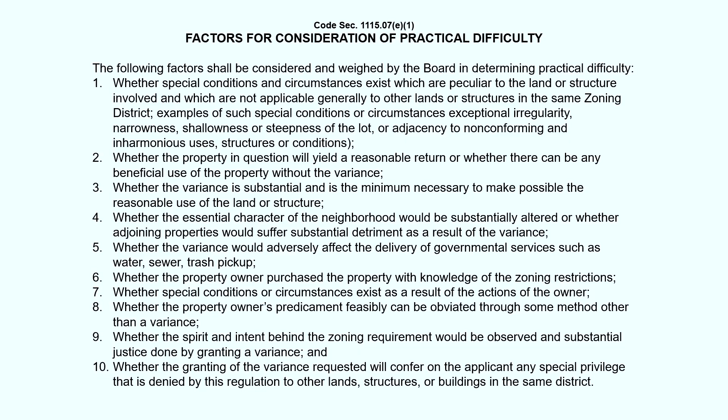This board is the final administrative decision maker for all regular variances. With that, we can proceed to hearing on the matters before us.

The first is calendar number 3622, the application of 2211 Lee Road Owner LLC, located at 2211 Lee Road in a C2X multiple use district, requesting 2 variances. First, to code section 1161.03C1, to permit the loss of 4 parking spaces for a new retail use, and to code section 1161.07A, to permit a drive-through window with less than 10 waiting spaces.

Now, would anyone wishing to testify in this matter please stand if able to be sworn in. Please affirm that you will testify to the truth.

Excellent. Now, there are 2 separate variances being requested. Each one of them is decided on its own merits. As you'll see, the board will have the choice when we get to that part of the proceedings to either proceed with those one at a time or to take the 2 together. That is at the board's discretion.

Now we'll turn to the staff presentation, but before that, can I ask that the staff report dated February 13th, 2026 be entered into the record? Seeing no objections, hearing no objections, the report is so entered. Please proceed with the presentation.

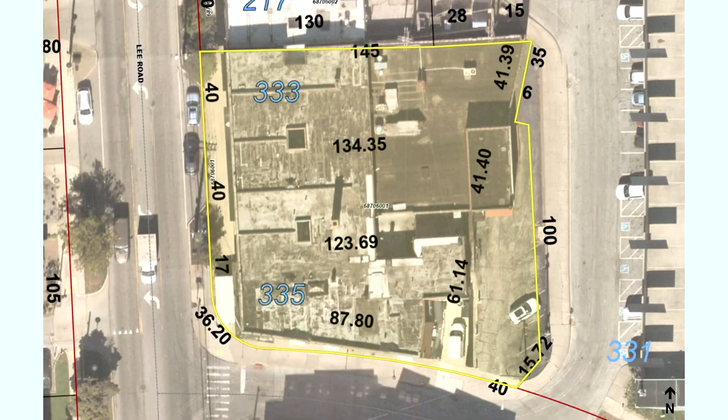From time to time we'll do a brief code background. I wanted to reiterate the purpose of the multiple use district, stated in chapter 1131.01C, which says the C2X multiple use district is established to provide standards for the continued operation of mixed use neighborhoods, to provide for dense mixed uses along main thoroughfares, and to concentrate mixed use buildings to promote and encourage pedestrian activity. Parking and driveways are generally located so as to not disrupt the pedestrian activity.

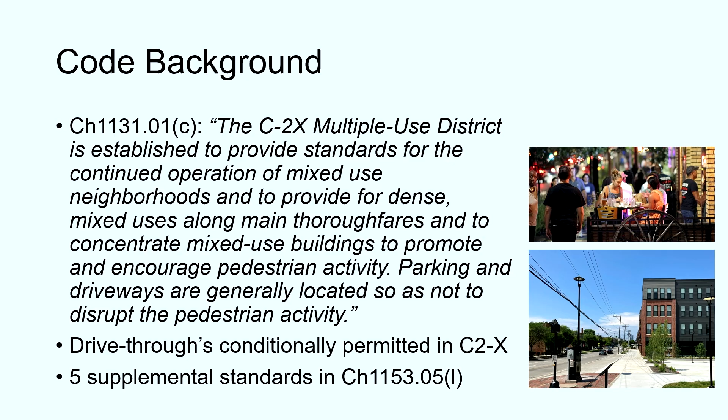Drive-throughs are permitted in the C2X district, and there are 5 supplemental standards relevant to drive-throughs in chapter 1153.05L. I wanted to briefly show those. Those standards describe that the facility should be located to be as least disruptive to pedestrian traffic as possible. It also describes a requirement for buffer yards. The Planning Commission may impose restrictions on the hours of operation, and it also describes required screening of the headlights.

Could you go back to that, please? Sure. All right, thank you. Thank you.

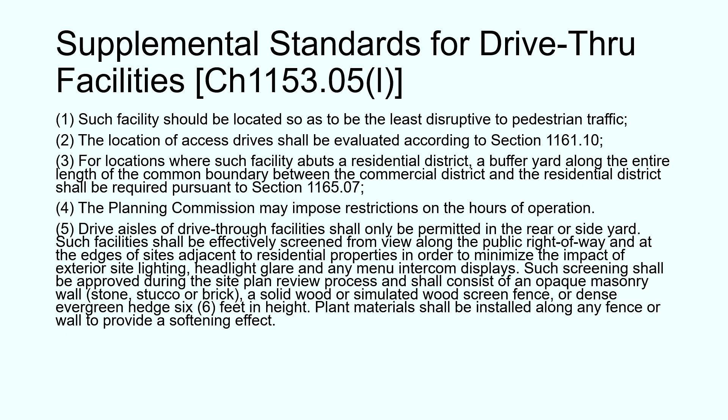2211 Lee Road has 4 parking spaces behind the building, which is code conforming because of an exception for existing buildings in commercial districts. The parking spaces are currently used as employee parking. The parking will be removed for the proposed drive-through and requires a variance.

Customers will enter the proposed drive-through from Tullamore Road and then turn back onto Tullamore Road or continue north and exit onto Cedar Road. The proposed drive-through has 3 waiting spaces, which requires a variance. Code section 1161.07A requires a minimum of 10 waiting spaces for a drive-through facility.

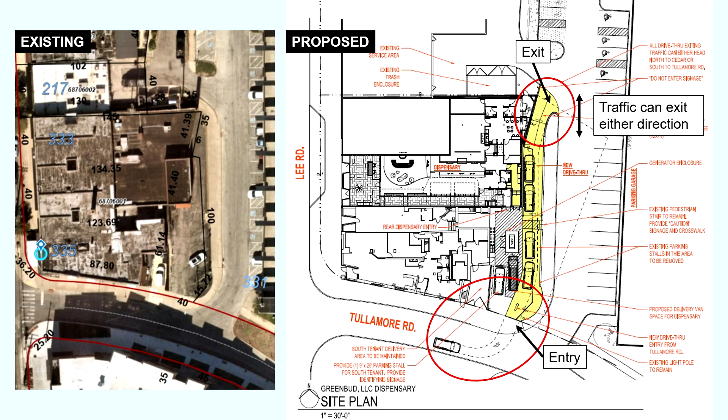Deliveries currently go to the parking area behind the building. With the proposed drive-through, delivery vehicles will enter the drive-through and then move to an area between the generator enclosure and a parking space for the adjacent retail tenant.

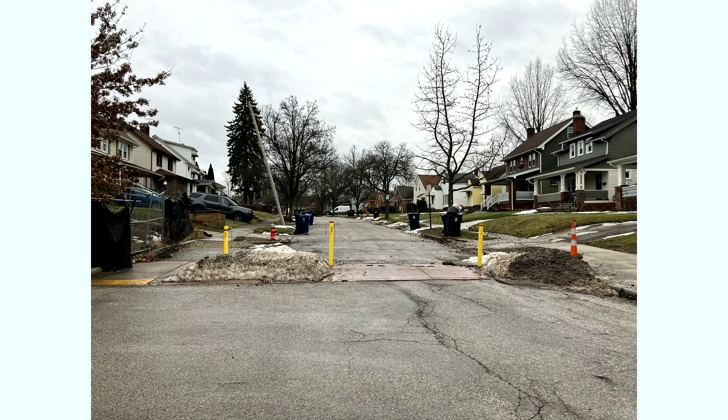One important thing to note is that there's no access onto Tullamore from Lee Road. Those bollards you see are normally chained, but are open at this moment for construction.

Since the applicant mentioned that their employees will park in the Lee Road garage, I checked how full the garage was earlier today. The first and second floor were about 50% full, but the first floor is only open to residents of the Marquee development. The third and fourth floors were completely empty. It was at 10 today.

Immediately across the street, there was another surface parking lot that was completely empty at the time I visited the district. But it's important to note that many of the businesses in this section of Lee Road near the applicant are restaurants or bars that were not open at the time I was there. Further down the road, the surface parking lot between Meadowbrook and Silsby was nearly full. That section of Lee Road has Stone Oven, Phoenix Coffee, and many more businesses that were open during that time.

In summary, if approved, conditions should include: calendar number 3622 is granted to code section 1161.07(A).

Calendar number 3622 is granted to code section 1161.03(C)(1) to permit 0 parking spaces as shown on the drawing submitted to BZA dated January 11th, 2026.

To code section 1161.07(A) to permit a drive-through window with 3 waiting spaces as shown on the drawing submitted to BZA dated January 11, 2026. Vehicles waiting for the drive-through window shall not queue onto Tullamore Road.

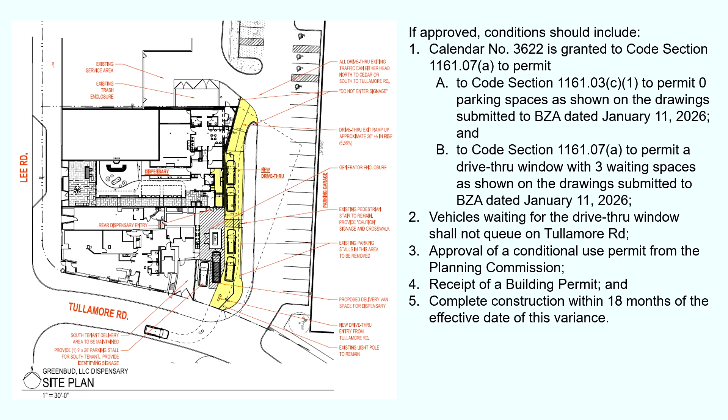Other questions? Mr. Chair? Yes. Are there any other commercial properties that have drive-throughs in this area that are similar or dissimilar to this? How would this compare? I understand this is a unique case and that's why it's here, but do we have anything to compare it to in the area?

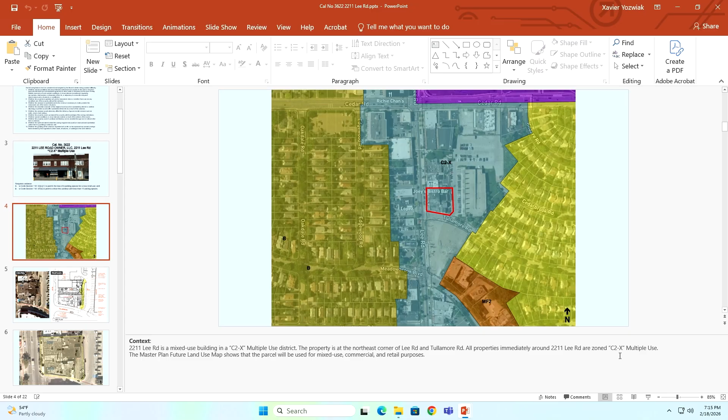The closest property that I'm aware of would be the Wendy's along Cedar Road, which is this building, I believe. And to my knowledge, they have more than 3 waiting spaces, but I'm not aware of any variances granted at that property, or if they have the full 10 spaces.

Mr. Chair? Yes. Is a drive-through required for this business, or is this something that they want? Is there some reason that it's required? From a zoning perspective, a drive-through is conditionally permitted, so there's no zoning requirement that says they must have a drive-through.

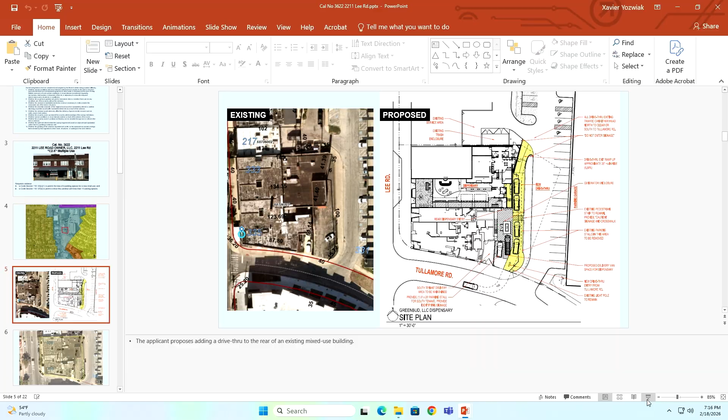Okay, thank you. Have we measured that drive-through to see how many—it's less than 10. How many less than 10 do we know? If we could look at a diagram again. I think we've had other drawings that would show—yeah, there's room for 3 cars.

Waiting. And if more than 3 cars want to be in line, where's that 4th car go? So one condition that we're suggesting is that those cars may not queue onto Tullamore Road, which is echoed in the standards for drive-throughs. Was that enforced?

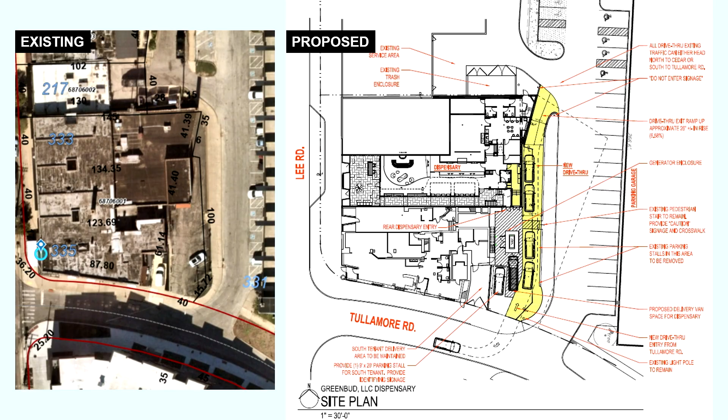Could you state your name and address for the record, please? Absolutely, Joe Andulix with Greenbud. We are now at 1200 West 10th Street, Suite 101, Cleveland, Ohio. Thank you. My name is David Kaplan, I'm with Oliver Architecture in Cleveland, Ohio, 7100 Euclid Avenue, Suite 200, Cleveland, Ohio.

Thank you. What we're going to ask you to do is to make the presentation you wish to make relevant to the request for the variance. You've heard some of the questions, but certainly there'll be more. One thing we note that may not always be clear is that when we grant a variance, it isn't to the applicant, it is to the property, so that any subsequent owner of the property, with any permitted use, gets the benefit of the variance we grant. This is why conditions unique or special to this specific applicant don't help us as much as explaining why this is a unique property requiring a variance that binds everybody else in our city. To the extent you saw the factors that drive our decision, I'm not going to tell you how to present, but it is helpful to this board to explain how what you present meets and helps us make the decision on those factors.

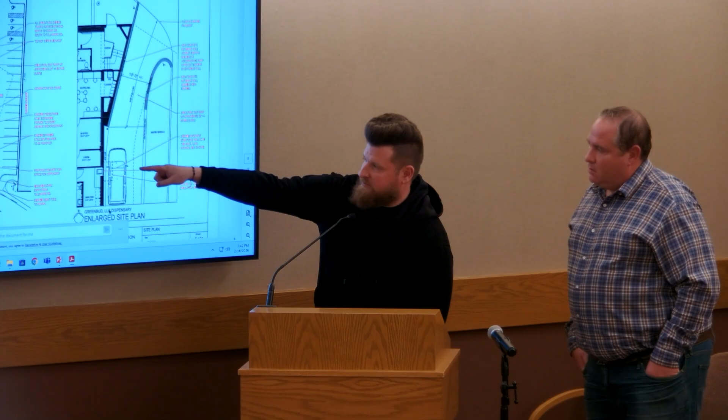If you could swing back to the diagram, please. The site plan, please. All right, so if you notice, that's obviously with a 3-car proposed queue, there would be room to get out for the parking here, as the cars wouldn't impede the space directly behind.

Other questions of the applicant? If not, we'll close the public hearing. Thank you. Thank you. Someone have a motion?

I would like to—we need a motion before we discuss. Mr. Chair, I would like to motion to table this agenda item, calendar number, what it—3622. Yeah, sorry, I have all my papers mixed up.

Calendar number 3622, to next month, pending the applicant providing vehicle turning diagrams for the right turn movements out of the drive-through for multiple vehicles, not just a standard passenger vehicle.

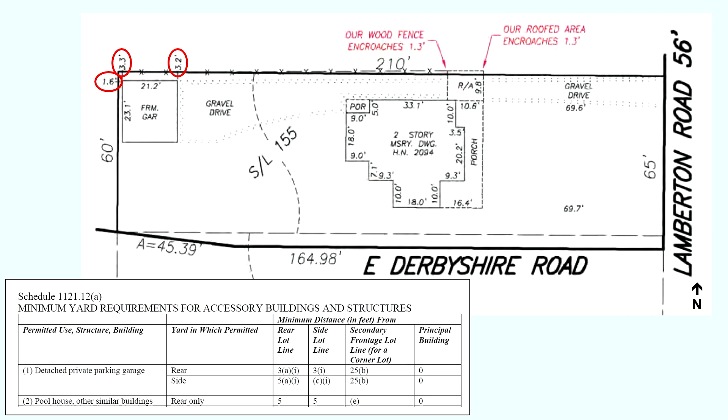The existing garage is 490 square feet, a code-conforming size in terms of rear yard coverage, the maximum floor area for a private parking garage permitted at the site. The garage will continue to provide 2 off-street parking spaces after the renovation as required by code.

Here's a look at the garage in the context of the primary home as you head down East Derbyshire. Here is a view of the garage from the front yard of the property west of the applicant. As you can see, despite the close setback, there are no windows facing this property.

Here's another look at the narrower 1.6 foot setback being requested for the variance, and on the other side, here's a look at the 3.2 to 3.3 foot setback. As you can see, the neighbor's garage is probably built too close to the property line. There is a small boarded-up window facing this neighbor's property.

Which is, on that picture, which is the applicant's property, which is the neighbor's? In this photo, the applicant's property is on the left side and the neighbor's property is on the right side, the right side of that fence you see in the center. I'm sorry, say that again? Yeah, the applicant's garage is on the left of the image and left of that fence, and the neighbor's property is on the right, to the right of that fence.

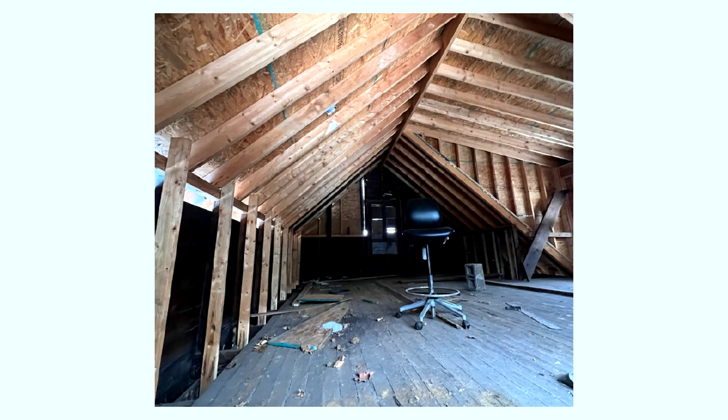The applicant included this photo that shows the loft space that will be converted. In the center of this photo, towards the back, you can see the boarded-up window that faces that northern property line, where that little bit of light is coming through.

I included this photo to give you context of the backyards near the applicant. On the right side, one of the neighbors two doors down has a carriage house with a similar shape. Here's another photo of that carriage house at the neighboring property. But more generally in the neighborhood, you see single-story detached garages or attached garages.

If approved, conditions should include: calendar number 3624 is granted per code section 1121.12A2 to permit a garage with living space to be 1.6 feet from the rear lot line and 3.2 to 3.3 feet from the side lot line, as shown on the drawing submitted to BZA. Receipt of a building permit and complete construction within 12 months of the effective date of this variance.

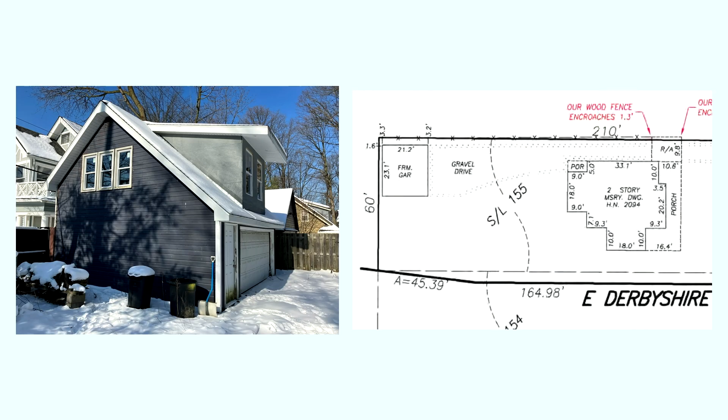Thank you. Board, are there questions for staff?

I'll ask one, and this is, as you know, from when we have these living spaces close to property lines: do any of those windows overlook a neighbor's structure and give views of windows or other activity spots on the neighbor's property?

The one window that meets that description is the window that is currently boarded up, seen in this photo from the applicant. If that window was to be replaced with one that wasn't boarded up, it would be looking into the neighbor's backyard.

Where in this picture is that window? On the very back. Okay, and that would overlook what? That would overlook the neighbor's backyard and garage. Okay.

So the windows in the center of the structure. Okay, right there. Got it. It's hard to photo.

Is this construction already underway or completed and now they're coming for a variance? The construction is not underway, to my knowledge. The garage is an existing garage with the loft space that is already there, used for storage.

Board, other questions? On the first slide there was some red writing talking about encroachment. Is that the neighbor's encroachment onto their property? On the site plan? Yeah, that is their wood fence, which encroaches slightly on the neighbor's property, closer to the front of the property. It also says the roofed area encroaches 1 foot 3 inches, or 1.3 feet. Correct. Is that an existing roofed area that encroaches? That is an existing area.

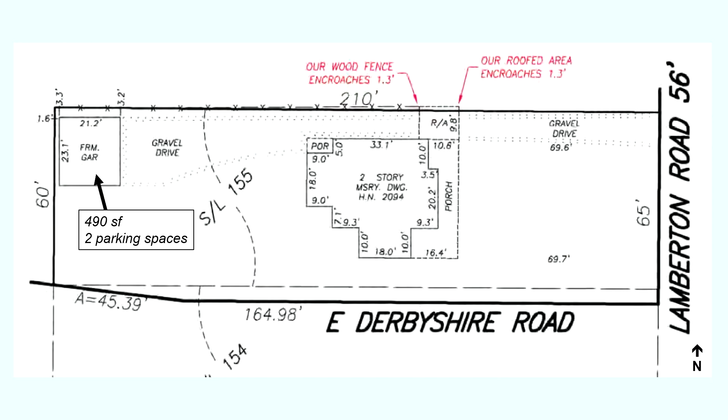That's interesting. Other questions? If not, if the applicant could please approach the microphone, and as with others, please state your name and address.

Good evening, I'm Alicia Cadet, and this is my husband, Steve Cadet. Our address is 2094 Lamberton Road, Cleveland Heights, Ohio. I believe you submitted an application in support. To the best of your knowledge and information, is that application true and accurate? Yes. All right, so again, please proceed with however you would like to present.

Anything that helps us with the factors that go into our decision would be helpful. So we purchased the home as an investment property, and a lot of what you're seeing had already been done to the property. So the windows were already in place, and the framing on the inside was already done. So it did not have zoning approvals. Once we purchased the property, we investigated and found out that we did need to do the zoning, so here we are.

If you could explain the need for the variance and why we should grant it. We are rehabbing the entire property. Inside is completely gutted, and it will be a 5-bedroom, 4.5 bathroom house inside. And since the work had already been started to do the loft space, we thought it would improve the property for the new owners once everything is done.